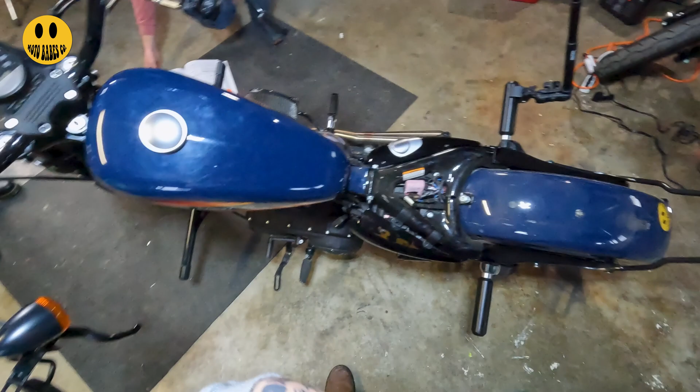This is what happens, you know? No matter how prepared, whatever. We're gonna have to be looking at all the work I've done on my bike personally - me doing a couple things, watching a YouTube video, doing a couple things, watching a YouTube video.

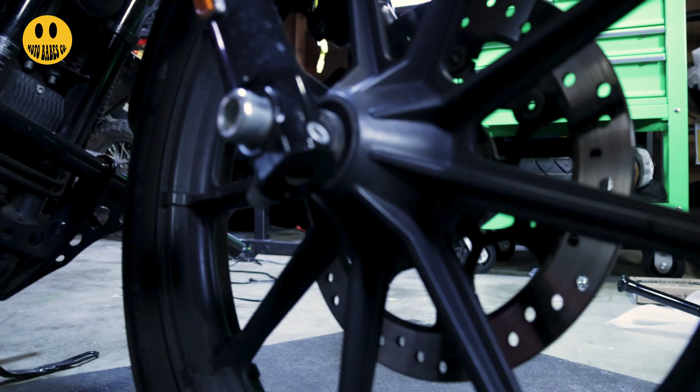Hey y'all, it's Dahlia, and so we started Audrey's build today on Sunny. As you know, we're doing a front end build, changing a lot of the cosmetic things. Mine's a little more in depth with a few other changes, but essentially what we were doing and how we were starting it is going to be the same. We tried to document that as best we could, but we realized that if we were going to actually learn how to work on our bikes, we couldn't focus on filming as well. So we went through essentially exactly what I'll be doing with my bike, and hopefully this time we've learned some kinks and can document it appropriately.

So what we've learned from taking down her bike is exactly what I'm going to break down for you guys, separated into the appropriate videos. We're going to start with the essential takedown, taking everything out that I need to take out, and then working from that point on. So let's get started with the first step: remove your seat.

This is Moto Teach. She's gonna teach you how to use your goddamn manual.

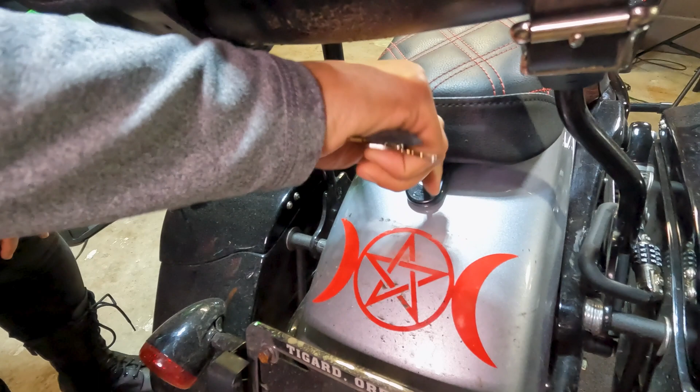We are going to start from where we actually need to start, which is at the seat. So I have a hex - oh, by the way, this is actually just a universal screwdriver. It's not just for the sporty bob seat, but yeah, you get the gist. Seat, because we want to gain access to our battery.

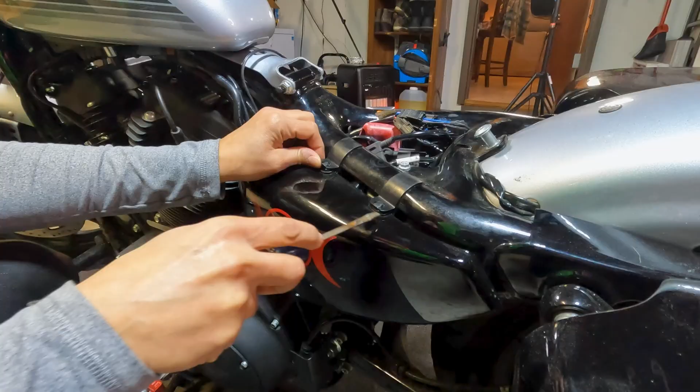So once you remove your seat, you're going to want to come around this way - it's my favorite part. Disconnect our battery for safety. All right, we're going to remove the negative, it's the black one.

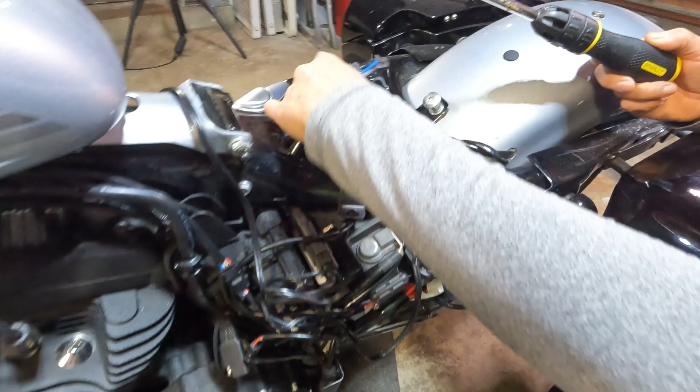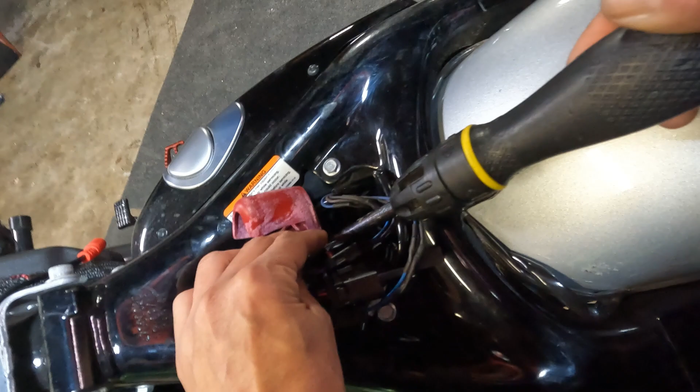I can't see it either. Get the camera on my face.

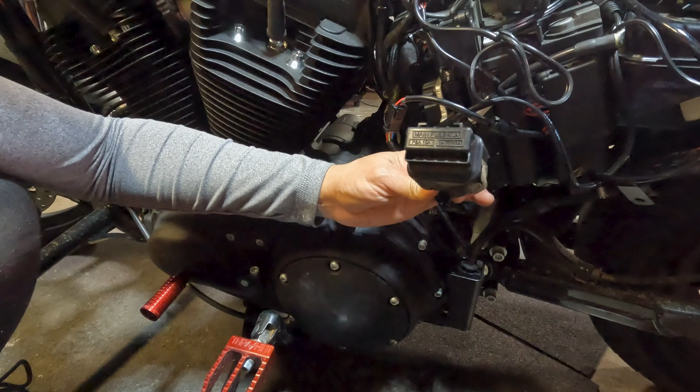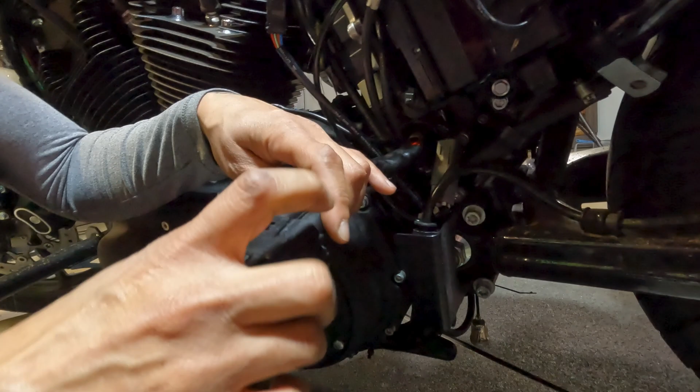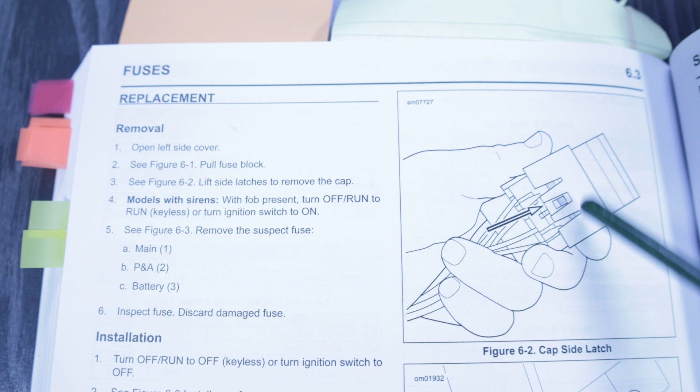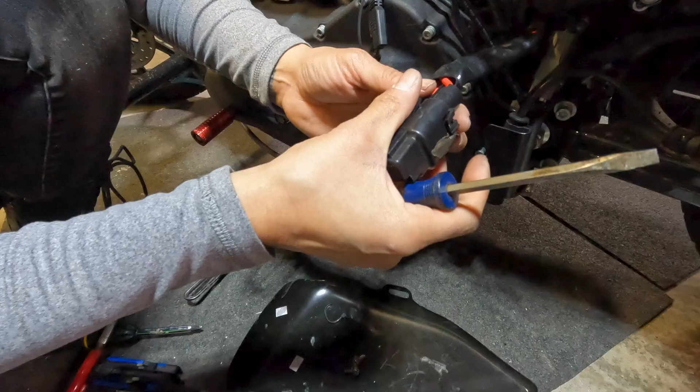Okay, so what you're gonna look for is your main fuse. This was in my battery area, which I didn't know, because I don't know what the fuck I'm doing. Who am I? What do I do here? That one hadn't been open in a while, so it was a bitch anyways. But don't forget to use your manual, y'all, because it tells you what to do. Fucking idiots. But so fun.

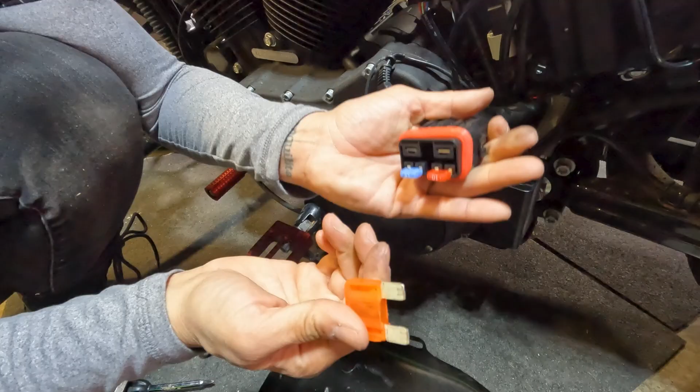And here you'll find your main fuse. FYI, this is like one of the first steps, not one of the middle steps. So here we start fiddling with the bolts to remove the tank. Unplug, undo your battery, unplug your fuse, and then get to it.

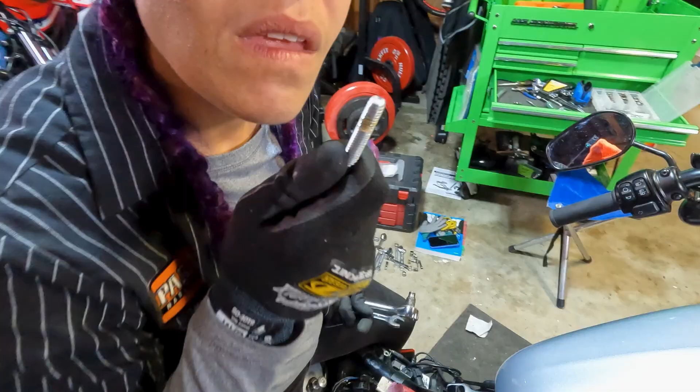And the handlebars are already... that shit was hot.

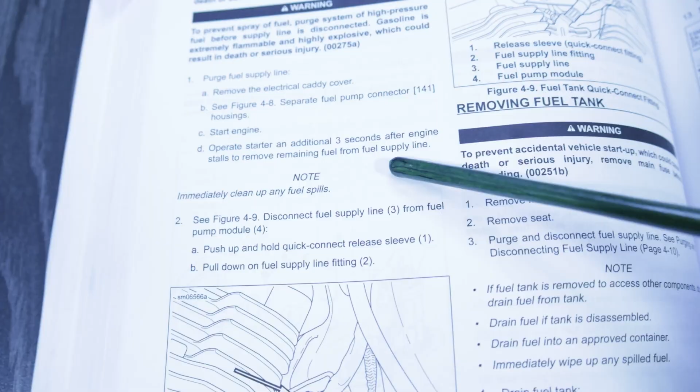My bike's put back together, so all I need is my tank bolts, and you know where those are - everything's on the top part. Don't forget to read your manual. Fucking dumb, dude, but fun.

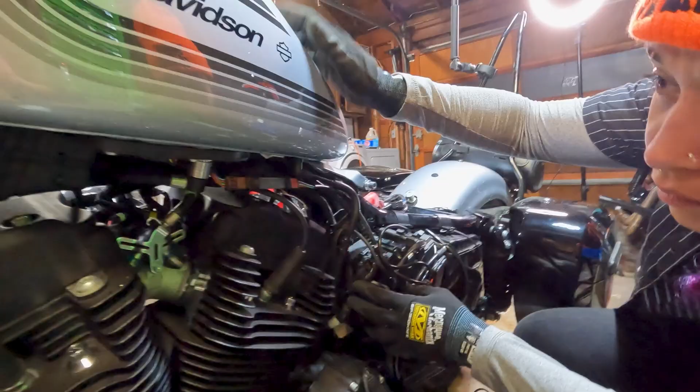Yeah, and I did this after I took apart my... and we figured things out the hard way. I think that makes us even more knowledgeable. The muscle memory involved in learning shit the hard way is immeasurable.

That's what's up. So there's two pieces here - one goes to your electric, one goes to your gas line. I don't know if you can see that there. Gas line, gas under the engine, and then electrical. And that's it, 2 pieces.

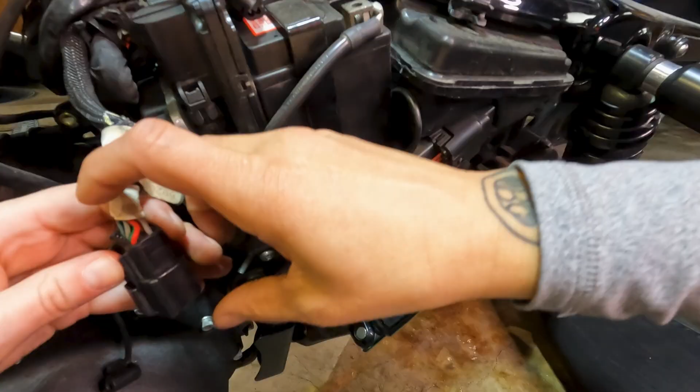Here you see me taking apart the right way, where you start from all of your connecting pieces. Makes us better at actually working on motorcycles. We have small hands - that's a benefit. Let me use my small hand. Yeah, this was a super complicated way that we did all ass backwards, but we still got it worked out.

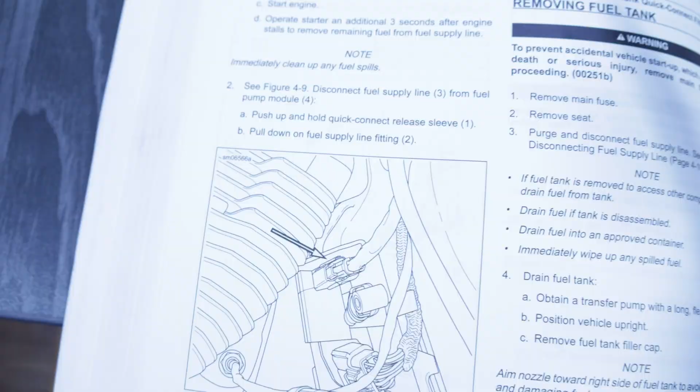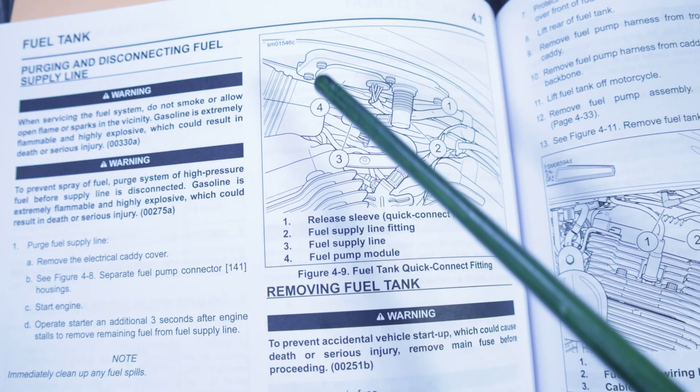Never mind the tacky Florida LED lights that you're gonna see eventually, and never mind that cord sitting there. Spoiler alert, spoiler alert. I'm from Florida, I'm tacky as fuck. I like lights, give me lights.

Oh, look at how nicely that tank just comes off, just like boop, butter. Beep, boop, bop. Or, yeah, you could do it the way I did it, which was ding dong, pretty much.

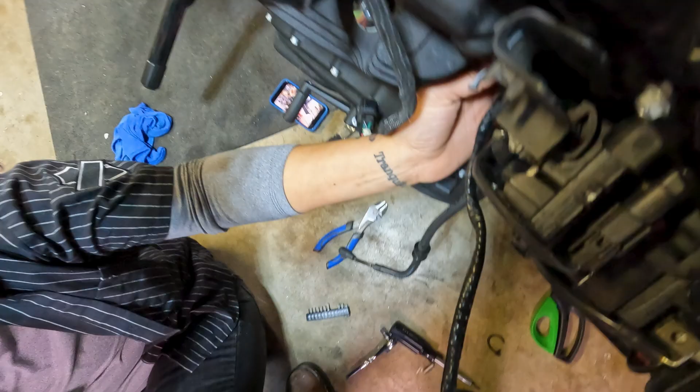Here we are. We could have looked - I could have looked at the manual, but I was like, fuck that, open the manual, I'm gonna learn this. And I did.

Yeah, what I've seen with this - look at the manual. You don't see me, but I'm actually unplugging her tank underneath. She's holding it, and I'm unplugging it. Like, this is the dance of joy.

Well, we hope you guys liked the video. It's our first time, so be gentle. We had a really great time doing the whole thing. My bike took a little bit longer, and then once my bike was done, her bike was so much easier. So we definitely learned a lot, and we have a lot more videos coming too.

Our next video is going to be the caddy harness removal, where we take down that little harness case. We're going to figure out the wiring, what goes to what, collect it and run it through the front end and take out the handlebars. So that's the next video we have in line. We're super excited because this was a lot of fun. It was great, so I recommend anyone doing their own modifications to their bike.